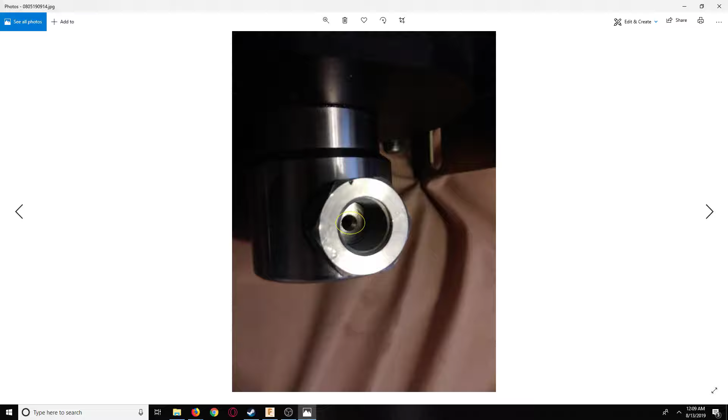So here, you can see I already circled it to show the supplier, but you can see basically in here, this is the outlet, which is the M14 by, he says 1.5, but he says M14 by 1.4, which doesn't make any sense. There's no such thing as M14 by 1.4. There's such a thing as M14 by 1.5, and I tried a 1.5, and the 1.5 is in there.

I'm going to have to go inside one of my Harbor Freight tap kits, and it has a pitch gauge, and I'll use that to double check before I have it machined. So basically, this thread doesn't really do anything. It's just straight thread, so it doesn't actually seal. So you have to have a tube go down here, and there's actually a countersunk hole here, and the side of the tubing needs to seal around this hole.

And I believe I showed you guys in the last water jet video. Did I? Yeah, I must have showed you in water jet. Oh, so this must be episode 17, not 18. So I must have showed you in that one. Did I show you in water jet 15? No. I showed you one of these. Oh, I showed you in water jet 14. So again, this is where it is. Right there. Right here.

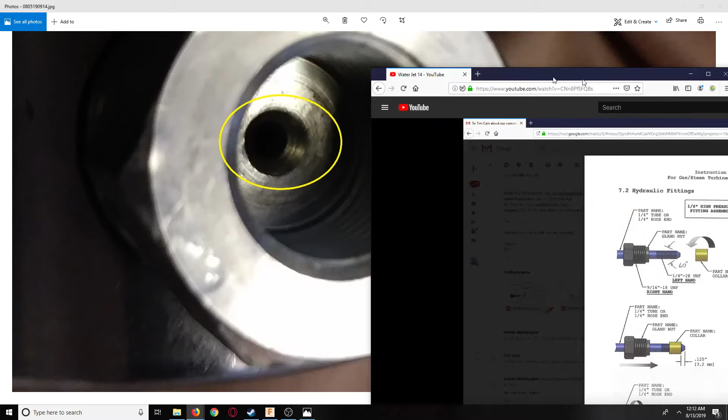So you see here, this goes in there 60 degrees, and this hole actually happens to be 60 degrees. I'll show you guys talking with these guys. And 3.2 millimeters deep, that's plenty. I believe it's like 3.03 millimeters deep. So this should work with no modification. But the issue is that it's an M14 by 1.5. So the question is, can they get a gland nut with an M14 by 1.5? So we'll see. Can't believe they can't make a gland nut with an M14 by 1.5, or a 7/8.

Actually, it's okay if they don't have a 7/8, because what I would like to do is have a 90 come off the cutting head and go out. So anyways, this on the pump side should work. Obviously, it's the wrong taper. Well, actually, this is going to go into our manifold that we designed in WaterJet 16. In WaterJet 16, we designed the two manifolds, and then this part that goes up to the cutting head goes in there, and it latches in.

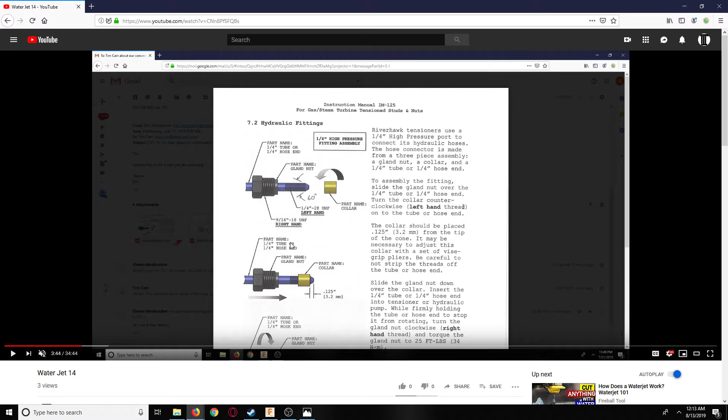So that's a 9/16, and then we have two other 9/16s coming out of the two outlets, and then those are going to M14 by 1.5, and those have the same exact setup as this. So this is on this side of the manifold, and then this is coming from the cutting head, and then both sides in the pump. It should work on all sides. So that's great. Now I'll show you guys basically what we have to go off of. So let's get rid of that.

So basically, this is what the inside of that hole looks like: a 2.5 millimeter hole and 3.03 millimeter depth by 6 at the top, which is a 60-degree angle. So that's perfect. And then let's see what he said on the back side. We're going to design this thing and then send it to our supplier. And actually, I did design something off screen, so I'll show you that as well. So here, diameter for big hole is 6 millimeter. Okay, I thought he meant a different side. He says small hole is 2.5. I could have determined that from there, but that's fine. Okay.

And another thing that's super important is he gave me the pump charts for the amount of volume that we could press. So this is in bar. PSI to bar. And if you go on the WardJet website, WardJet University Nozzle and Orifice, and you go down here, it has a really nice chart with empirical data. And I made a mistake. We actually have a 5 thou orifice and a 20 thou mixing tube. So we're actually slightly below the 3 times. And they do have a 15 thou, but it's for their other cutting head.

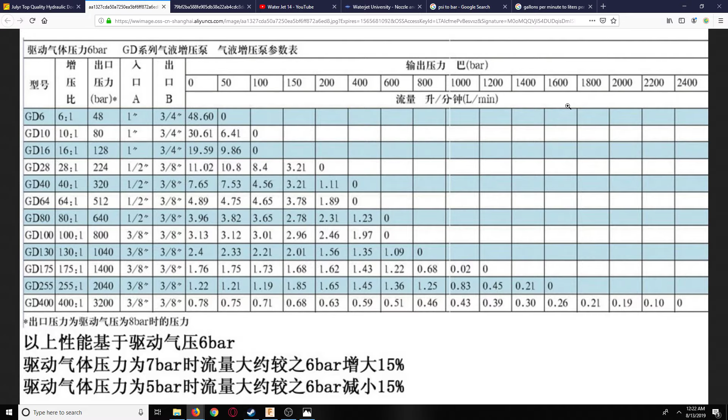Cutting head. Okay, so now we have the idea. Basically, we're going to need this guy here, 0.27, which is about 1500 bar, which is about 22,000 psi. And then if we could increase the psi on both the compressor and the incoming water, we should be able to get higher outputs. But basically, this is already incoming from the compressor. So we're going to need to bump up both the compressor and incoming water pressure in order to get the really high flow rates that we need out of this orifice.

Or the other option is that we have to jump to a smaller size orifice, 0.004. And then that will be very hard to accelerate even 120 mesh garnet, which is basically what we're going to run. Most run 60 or 80, and we're going to have to run 120 in order to be able to accelerate it. I believe the Protomax runs 80. Protomax Waterjet.

ProtoMAX. Garnet. Yeah, it runs 80 mesh. So it runs 0.25 pounds per minute at a 14-pound hopper, so it's about 60 minutes. Run for about 60 minutes, which would be great. That would do one whole shredder if that was the case. But obviously it's got only a 12 by 12 cutting area, so you'll have to swap it out anyways.

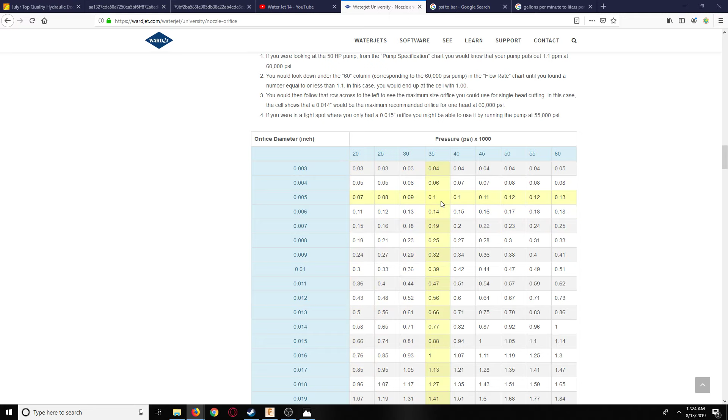Okay, so we're gonna have to run 120 mesh because we have quite a bit smaller orifice. So now they have an 8 thou orifice and we have 0.005, 5 thou. I thought we had a 6 thou, but we actually have a 5 thou, which is pretty good. So we could at least be in the higher range, 22,000 psi, if we can't increase all the other stuff. Okay, so that is done. So you get the idea.

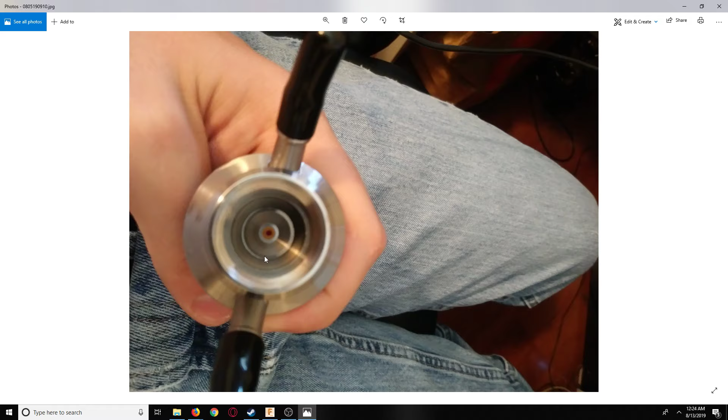This should be good. So if we have some time before the end of the video, we're going to model this. And then the other thing is this guy here. So this is the cutting head, and what you see is the orifice in here. So there's a shoulder right here, and then this is 7/8 by 18 in here. And I talked to the engineer at AccuStream, and what he says is basically you have to press some sort of stainless steel taper against this orifice. And this orifice, from what I've seen, has a 60-degree taper.

I asked the engineer what it was, and he said that he couldn't disclose that information because basically they don't want people to copy it. But I mean, you bought it, so you could just kind of measure it. So yeah, I think it worked out. And you know, I come from semiconductors, so I know exactly what that's like. You can't disclose that kind of stuff.

Yeah, so I asked him more about the dimensions of this thing and the size so I didn't have to measure it, but I measured it anyways, and now we have a good idea. So this has a little counterbore it goes into, and then this is pressed. The idea is that this is going to be pressed really, really hard by whatever you screw down in here, and it will seal up. And so that's what the cutting head looks like, and then of course the two abrasives go in here. And so let me show you that model here.

Also, I'm really, really close to getting some of those shredders ordered. I hope to at least have it by Wednesday again.

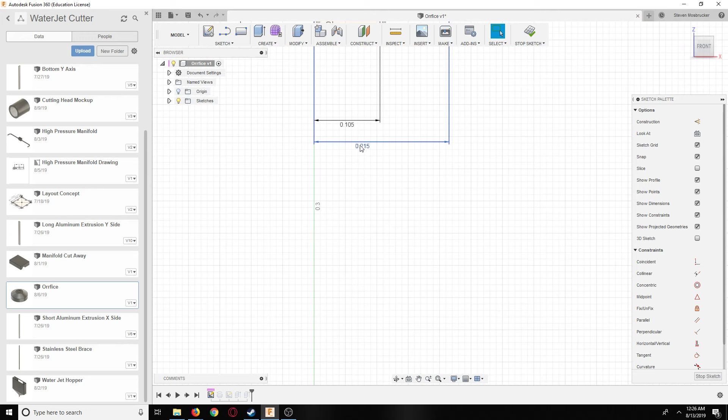So here's the orifice that I modeled. So we'll see basically what I revolved here. This is what the profile looks like. So this is 0.22, and I think I measured this with a carbon fiber one, so I might want to measure it again with this Ventor, just to verify, because that's why these are in these kind of whole numbers. I might have brought my other calipers up. No, I think I measured it with these carbon fiber ones. That's why it's only to the hundredths place instead of the thousandths.

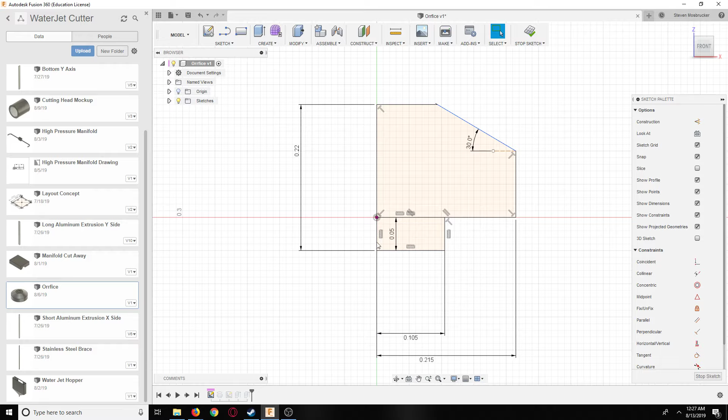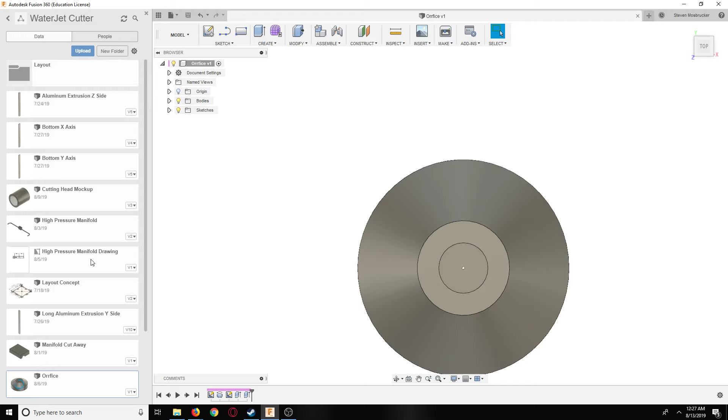But anyways, 0.22 tall. Oh, it's a 30 degree angle, sorry, not a 60. It goes down here, it goes down there, like that. And that's basically what it looks like. And there's kind of the mark of the hole, and then the 5 thousandths hole in it, right? It's actually 5 thousandths. Okay. So that's what that looks like, and then it goes inside of, where is it? Cutting head mock-up. So this is basically the cutting head mock-up.

I believe I used my depth gauge. I do have a little depth gauge thing; it's basically the same deal as using a caliper. So yeah, it goes in here. 7/8 down, and then there's a shoulder. Obviously down here it doesn't do this, it cuts back again, and then there's like a taper down, but this is the same deal. So this has all the right distances that it goes down to the orifice here, and basically it's got a seal around this orifice.

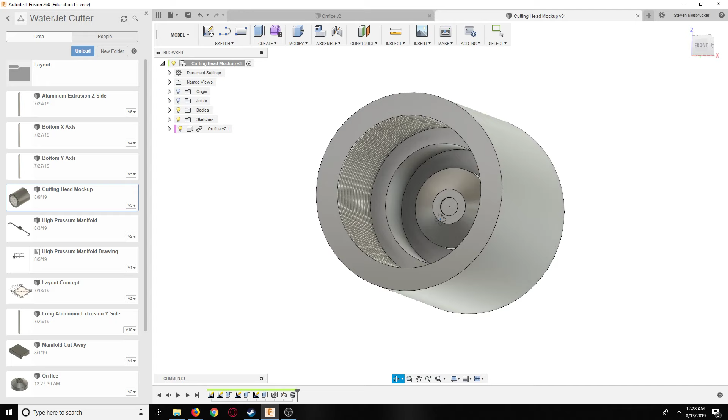So this is the model that I sent out to those guys for the cutting head side, and basically it looks like it's going to work out. For the pump side, we need to model that to send them an idea of what that looks like. So let's go ahead and go to a new design, and let's call it pump side mock-up.

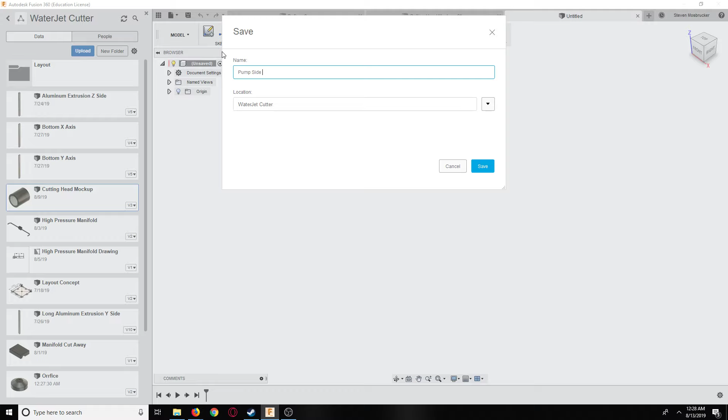Okay, obviously the side that comes in from the cutting head goes into the manifold that will be made, and on the inlet side, I'm just going to have those two ferrules. Once I get the right taper, I'm going to have those two ferrules go in there. Oh, here's the ferrule. Where'd the other one go? Oh, here's the rest of them. So these are 1/2 inch, so I'm looking for some more 1/2 inch. I already have this 1/2 inch T. These came in from Amazon, obviously.

So if I flip it over here, and I take this out, and then on the high pressure side, you easily thread the M14 by 1.5. So I know for sure that 1.5 will work because the thread's down, but the thread, I don't know if you could hear that, but the thread is really, really loose. So that's why you have to basically create that mechanical seal by pressing it down.

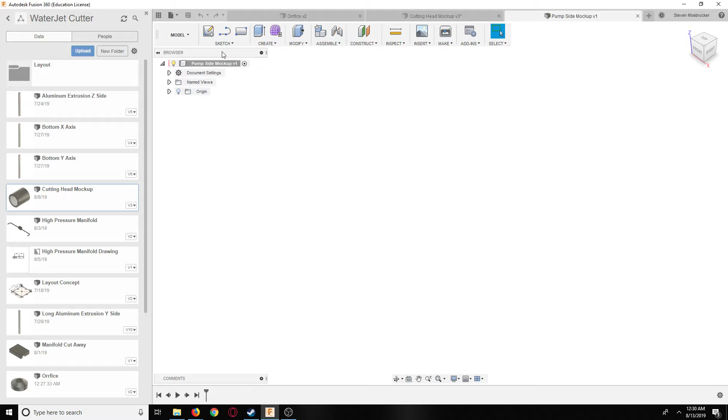Okay, so it looks like 0.495 diameter. So let's go here. Let's do a thing here at the top. Circle. 0.495. Okay. And then overall depth. .94.

This one, unlike my other one, did not come with the depth gauge adapter, so it's kind of hard to get it to sit flat. I might have to bring my other calipers in with the depth gauge or my actual depth gauge. It looks like it's actually kind of crowned in at the center. It's kind of weird. I'm gonna say 0.6 with these guys.

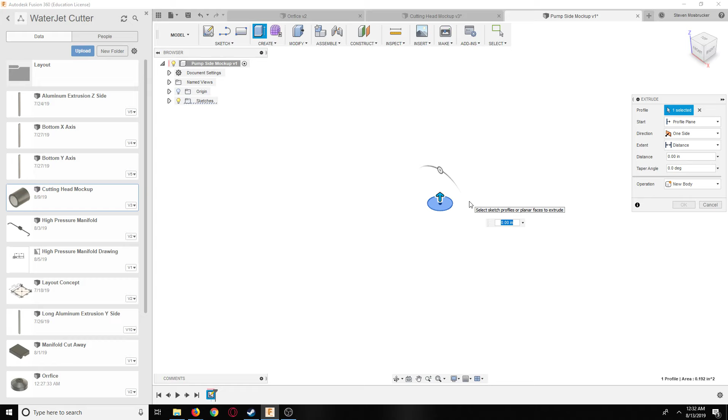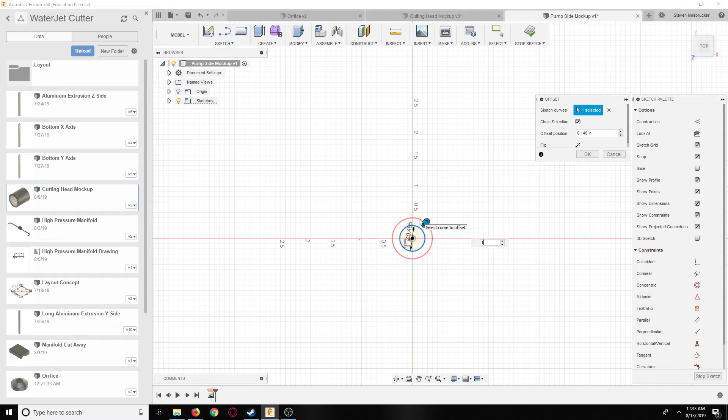So let's go here, and then basically this is gonna be 0.6. So let's offset this guy. And this guy. So 0.6 depth, and outside, let's just make it. It's obviously a hex, 0.1059. 0.106. 1.06, and then what do I say, depth 0.6. 0.6. Alright, let's double check one last time here.

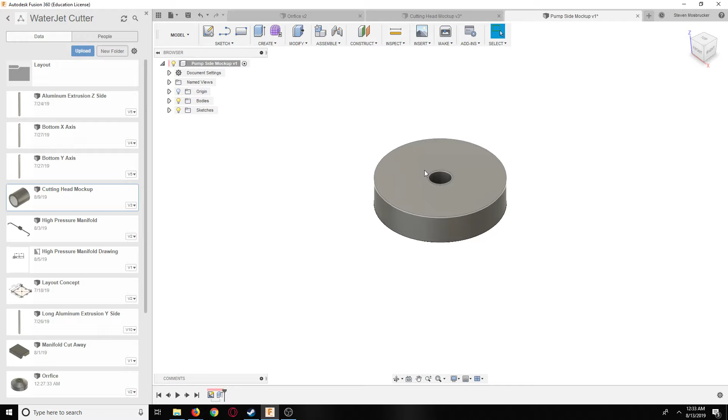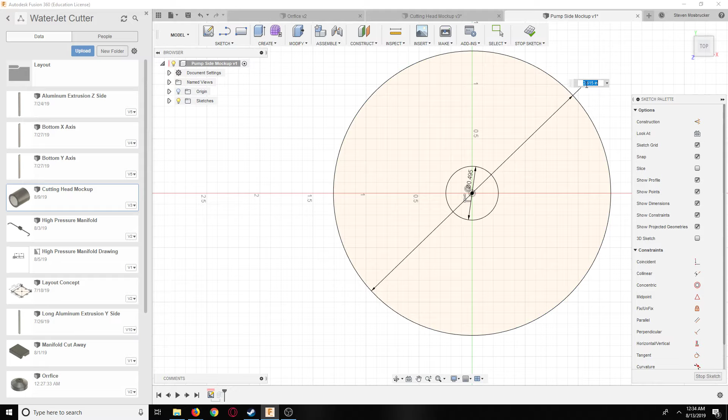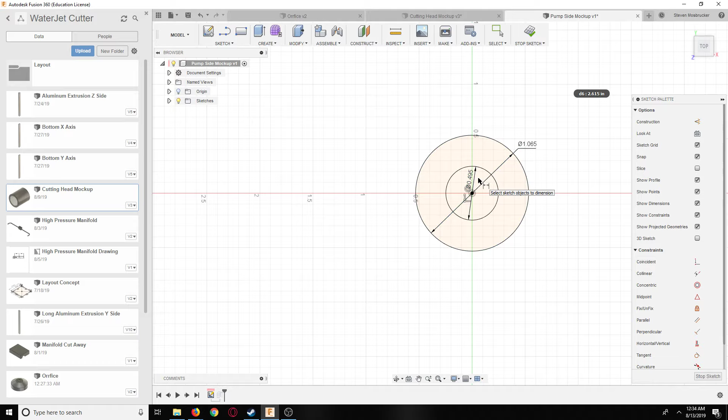Yeah, I would say 0.6 is good. 0.6. And that's 5 thou deeper than normal. That does not look right. Something does not look right here. 1.065. Oh. There we go. That's better. Double check the inside. I'm gonna say .490. Doesn't matter, we're gonna add a thread anyways. 490, 495, whatever.

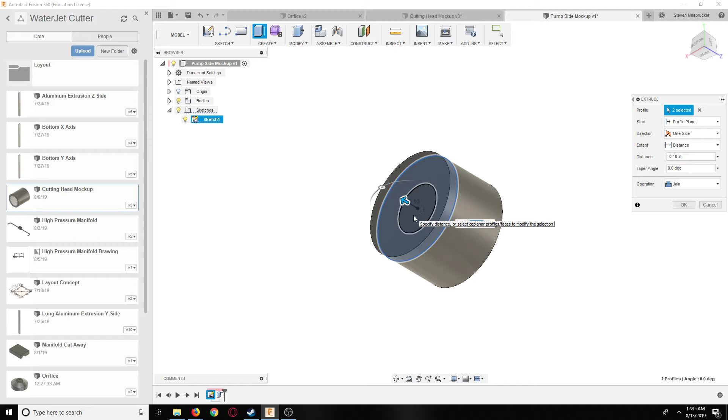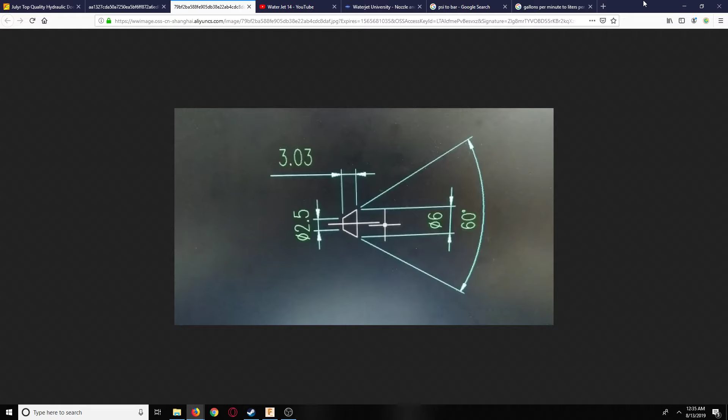Okay, so that's good. And 0.6 depth. And then what we're gonna do is we're gonna show that last sketch. And we're going to drop this guy down. Minus 0.25, let's say. Doesn't really matter. Sketch. And then we're going to do a sketch on the top. And then we're going to open up. Oh, that's on that page. This guy, go to the other one. So this is the top.

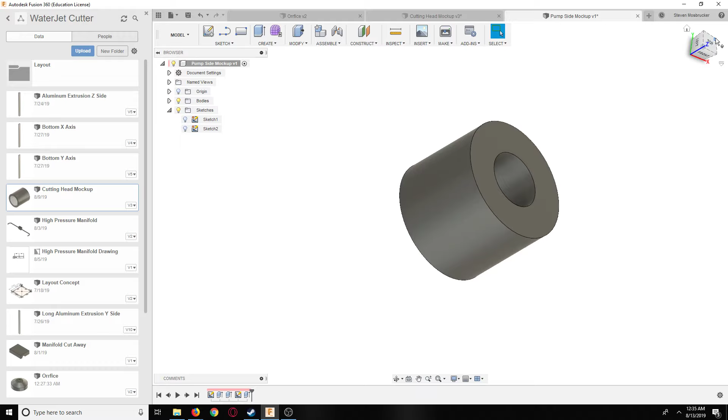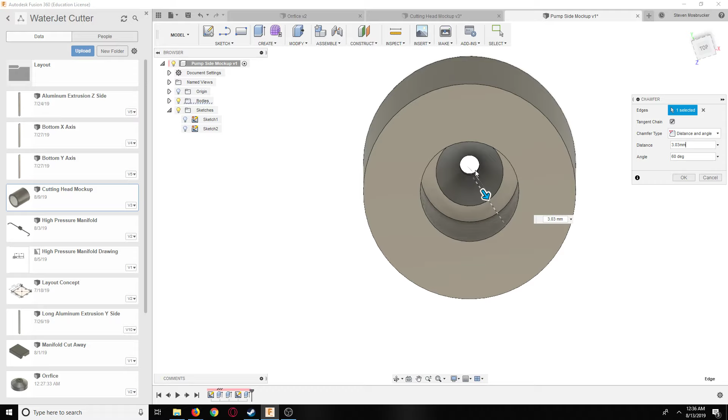So the main hole is 2.5 millimeter. There it is. Punch it through like that, and then go over here and we're going to create, modify chamfer, and we're going to do distance and angle. They have a depth and angle. 3.03 millimeters. Yeah, that's not it. So 3.03 is this distance here. So pretty much what I'm thinking is we're going to go to this. Or does it have it in the hole option?

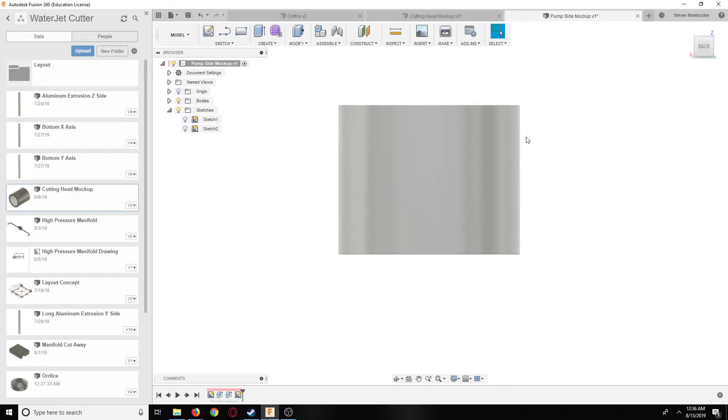How far over are we? 32 minutes. Okay, good. So let's just finish this up.

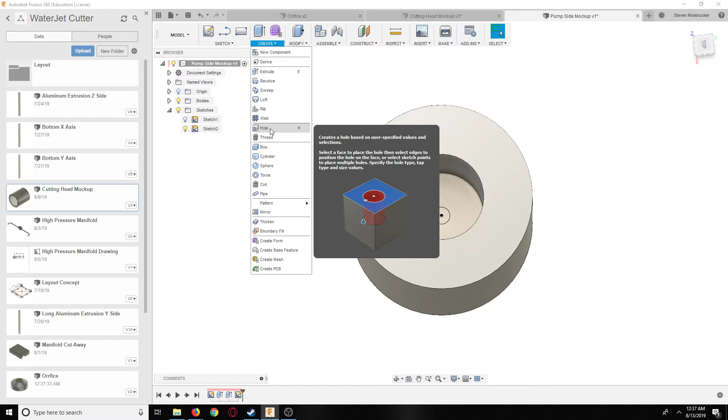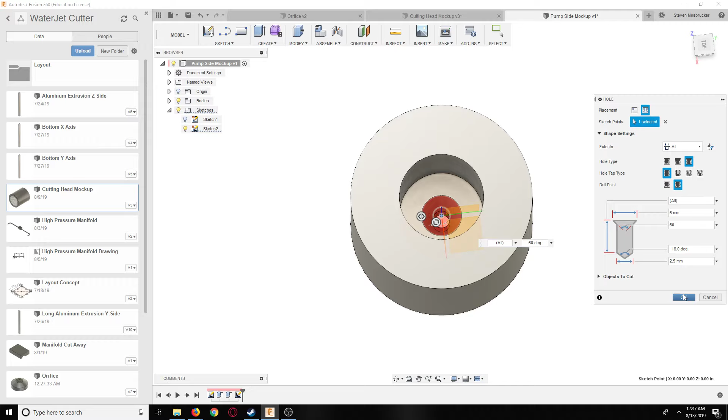Create hole. And this we want to be countersink. Where's my last sketch? Create hole. And then this is 2.5 millimeter. Through all. Countersink. How wide is it? 6 millimeter. 60 degrees. Boom, 6 millimeter, 60 degrees, bam. Hide this. And that is the inside of our pump.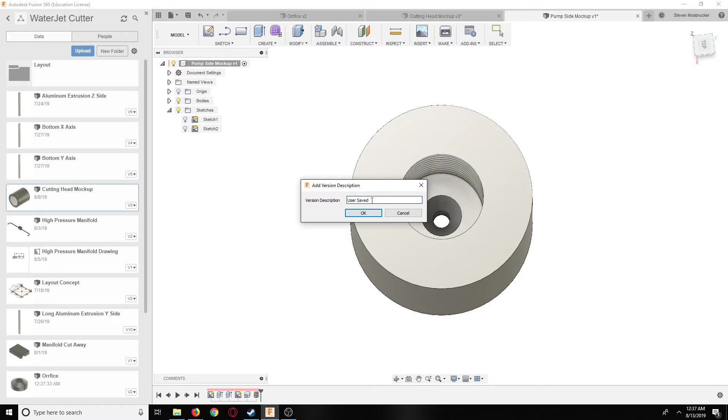Okay, so now let's create, obviously there's threads on the inside of here. So there should be metric. Should be 14 by 1.5, boom. And there it is. So that's it. Obviously this is hex, but that's fine. So this is the pump side mock-up, and that is it. Obviously this is different in here, but it doesn't really matter at that point. We just have to seal around this guy. And that is pretty much it.

So now we have this guy, we have cutting head side mock-up, we have manifold mock-up for him. Also I want to add a pressure gauge on there, output pressure gauge, so I'll add a third. So there's 4 things attaching this thing. We have 2 outlets, we have a pressure gauge, and we have the main outlet. So we're going to have 4 things coming out of that manifold on this high pressure side.

Then I got to get 2 ferrules, and I have a T. So then I need some 1/2-inch hosing, and then I need the blow-off valve. I need the blow-off valve and the air solenoid, the electric solenoid, and then I need the frame. Okay, so I think that is pretty much it.